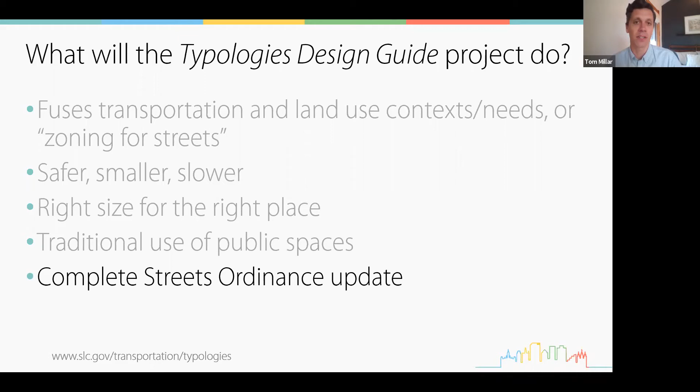The project also began the process of defining the desired changes to and updating our complete streets ordinance, which is turning 10 years old this year. And lastly, this whole process and the result itself has given us a better and more unified vision as a city, getting everybody on the same page and having designs that show what all of our priorities are together in one concise package.

One way that we developed this vision was by having a technical advisory committee. The technical advisory committee was made up of representatives of every department and division in the city that deals with the public right-of-way, as well as our partners at WFRC, UDOT, and UTA. It has been an awesome process to work together, and we're going to tell you a little bit more about that.

So let me dive a little bit more into the why, and then I'll give you a brief at-a-glance of the design guide, and then we'll tell you more about the process.

So the why—why do we want to change our streets? To be frank, our streets are bankrupting us. We spend way more money maintaining our streets than our streets give back to us. So I like to think of streets, because they do make up 80% of our public spaces, as either producers of wealth or consumers of wealth. They're either assets or they're liabilities, and often we put them in the wrong column. We think that they are assets when really we're just sinking money into them without getting anything back.

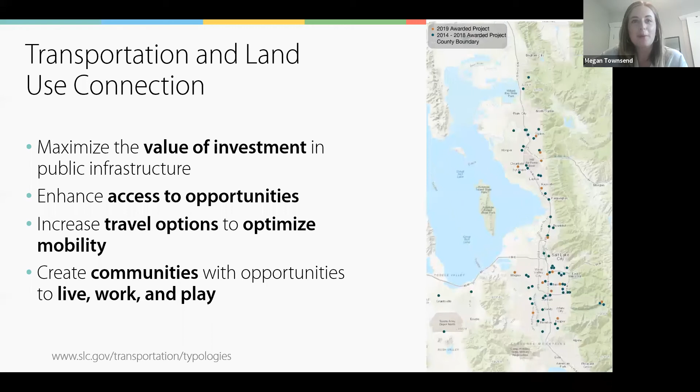And why does Wasatch Front Regional Council, which is responsible for producing the long-range regional transportation plan, care about land use planning, and why are we providing this assistance? As you all know well, land use decisions influence a lot of things. This is not an exhaustive list, but traffic, mode share, transportation choices, access to jobs, access to education, access to healthcare - so getting places - air quality, housing affordability, water use, commute times, open space, community equity, and a whole lot of other things.

So where things go matters for transportation, and it matters for our quality of life as a region. So that's why we have this program, and that's why projects like this are completely within what we want to assist with.

The Wasatch Front could be adding about a Taylorsville every year for the next 30 years. That's about 50 to 60,000 people. And 2/3 of that is from natural increase. So as we grow and change as a region, we want to be there to support. And that's what we do with TLC.

The Transportation and Land Use Connection implements our Wasatch Choice vision, which communities within the region weigh in on. They tell us how they're going to grow, and then we put it into a regional vision. So we're here to help communities figure that out. The vision is essentially an overlaid network of transportation and land use, right? And so where the nexus of those two things comes together, that's what we're working on with TLC. We're trying to do it in a collaborative way, bringing all the partners to the table. And this project was absolutely centered around collaboration. So we're glad we were able to support it, and glad we have great people working on it.

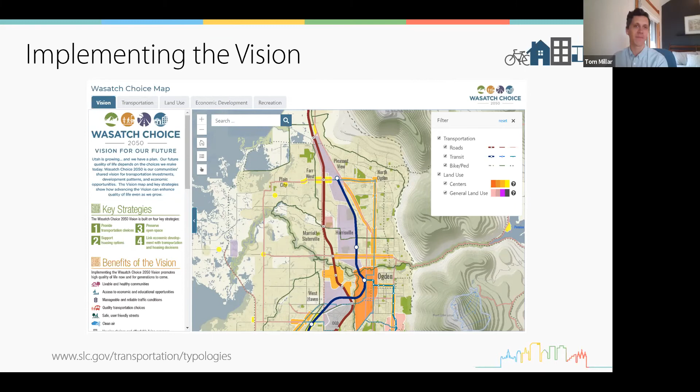Thanks, Megan. So we're going to give a real brief sneak peek at the design guide, and then we'll get into more detail later in the presentation.

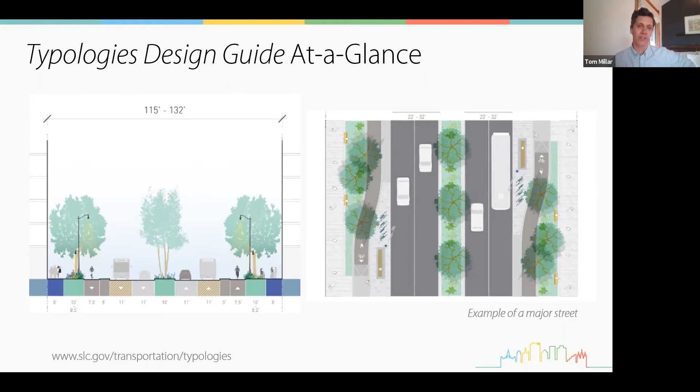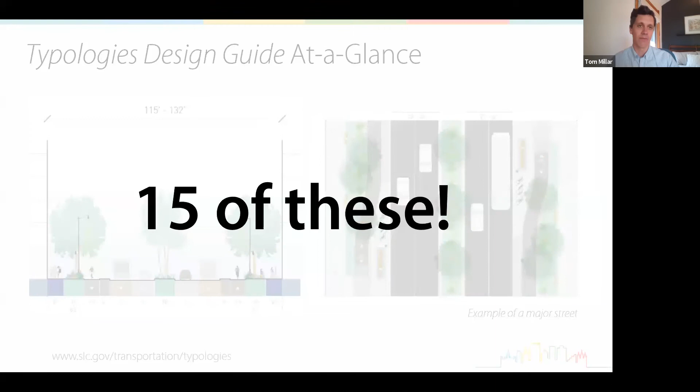But this is kind of the bread and butter of the design guide: our cross sections and information that went into 15 new types of streets. There used to be only 3 types: major or arterial, minor or collector, and local street. But those didn't match the various contexts we had within Salt Lake City.

We also knew that every street needed to achieve more than just the vehicle mobility function. So we developed these 5 critical functions of the public right-of-way and made sure every design had space for each function, prioritizing some higher depending on the place type. These are the place types we developed — a pretty broad generalization of the city's dozens of zoning types, so we knew how our streets needed to look differently depending on the area they were in.

We applied one of the 15 typologies to each of our 8,400 street segments in the city. You can see these colors clustered in different areas, showing where our land uses change, and therefore where our street designs change.

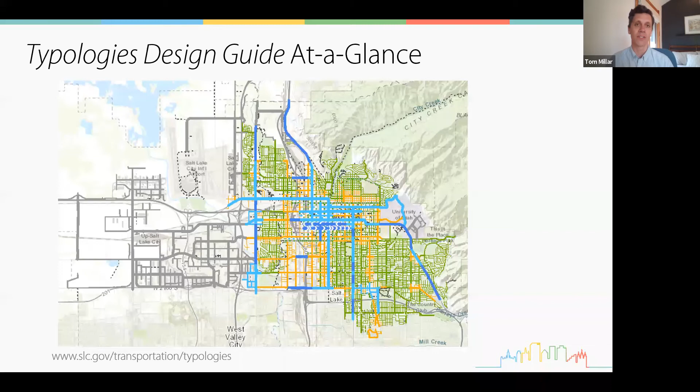Looking toward the future, we know implementation of the design guide won't be like your ordinary master plan — it's really just a reference manual, a book of ideas for when and if a project is built or a street needs to be reconstructed. It doesn't make sweeping changes all at once. When people ask how long it'll take to finish implementation, I say I don't know, it might be a couple hundred years.

We recognize this is by no means a perfect design guide, and just like zoning and our planning guidance, it will have to be updated as the city changes, as people change, and as our needs change. So we're going to tell you a little bit about the process, how we got there.

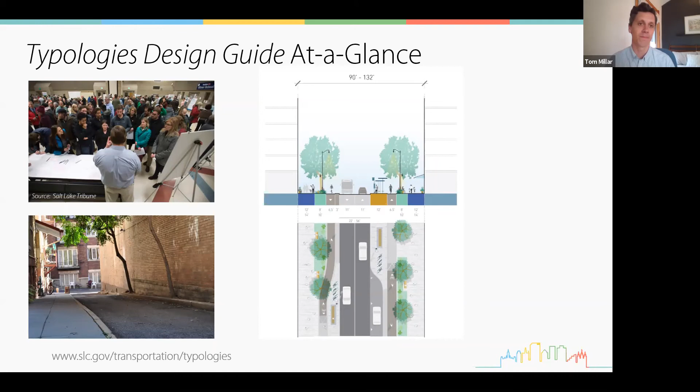Okay, thanks, Tom. I'm going to go through a few slides about what was happening in the background — the sausage making, and not all of it was pretty. The first thing Tom and I did, before we were even under contract as consultants, was meet one-on-one with the heads of all the different departments at Salt Lake City, to get a sense of their priorities and concerns.

We wanted to understand their expectations, and there were a lot of them. We also wanted to understand what background documents existed, what foundation there was to stand from. Then we engaged representatives from all these departments as our technical advisory committee, working with them throughout the process to keep everybody engaged and help inform us as we moved through it.

This also included updating a complete streets policy ordinance — we're not going to get too much into that today.

It was also a situation where the communities wanted to assign a typology to each and every roadway in the county, so that when the time came to make improvements, they knew what the blueprint was for those things. It was a little bit different, though.

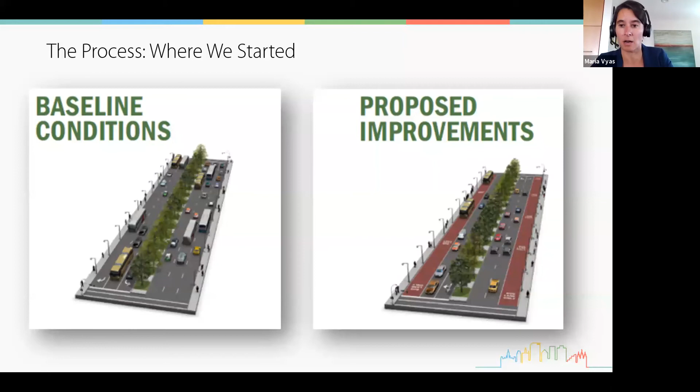So when we started, we were thinking we'd identify the key land uses, and for each one, say, okay, here's a transit-oriented street, or a pedestrian-oriented street, or a bicycle-oriented street, whatever — and that would influence the design of each roadway, based on what mode takes priority on each street. That's kind of where we started.

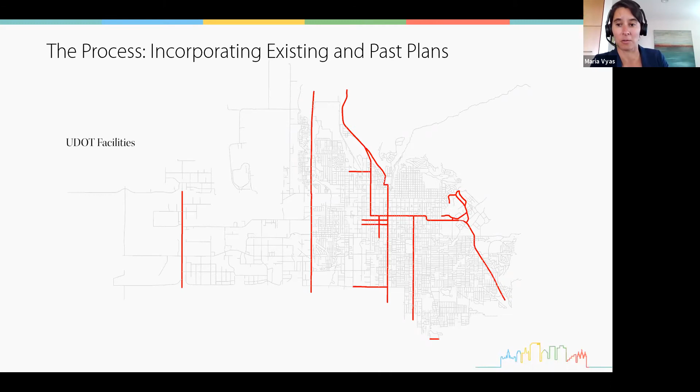So in some senses, this was like just a master GIS exercise where we took all that kind of information. We're like, okay, where are the UDOT roads? Because we know there's going to be a different set of design standards applied to those.

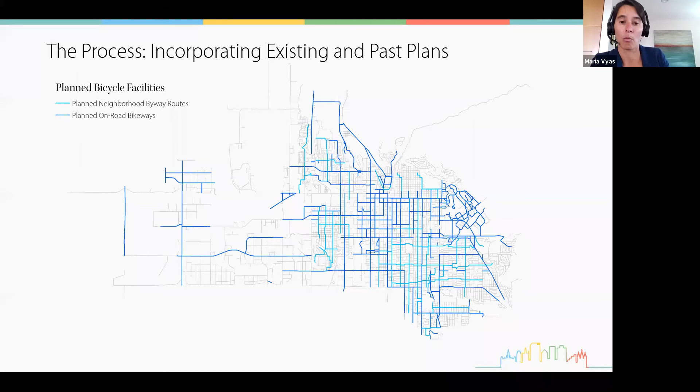What are the planned bicycle and pedestrian facilities the city's already given some thought to? What are the elements on the frequent transit network? On top of that, we knew there was a separate set of transit high investment corridors that the city really wanted to go to a different level of investment on, and the cross sections for those might actually look quite a bit different.

Part of this was understanding where the greening features were within the city, and how we take advantage of those and incorporate them into our plans. So we were in the process of mashing all of these sets of data onto one master set of GIS files.

It was the street centerline file, and we were smushing stuff on top of it, adding pieces of information like: is it on the bike network or not? Is it on the transit network or not? Salt Lake City had the advantage of already having a ped bike master plan and a transit master plan, which were really helpful because somebody had already given thought to what the priorities needed to be on these different streets.

So we were adding all those things in and getting through all of those transportation pieces. And then we kind of had to hit the brakes a little bit, because the piece that was missing was the land use.

We had walked into this assuming that Salt Lake City would have some kind of map or generalized sense of what the big land use categories were, right? Like downtown areas versus little neighborhood nodes versus residential areas or other kinds of things like that. The city didn't have that.

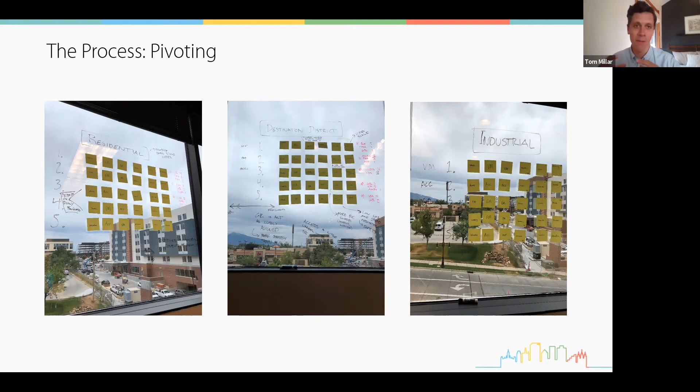That was something that I learned as a project manager and as a transportation planner, was that if we're really going to be serious about merging transportation and land use, then, no pun intended, we as transportation planners kind of have to take ourselves out of the driver's seat and ensure that transportation is not the leading authority or the leading purpose of our streets, because that was the problem we were trying to fix.

We knew that for a long time, our streets have pretty much just served a transportation purpose, but with all of that wealth of space that we have as cities, we knew that they could do more. And we knew that our residents wanted them to do more in order to achieve the various needs that they had in their life. So this was the first blush at these 5 functions.

We had person mobility, vehicle mobility, placemaking, greening - those are still the same. Access, we just changed the name to curbside uses because it was a little bit more descriptive of where in the right-of-way it was talking about. But we knew that there was going to be different modes or different uses, different types of use that were going to occupy the spaces dedicated to each of these right-of-way functions.

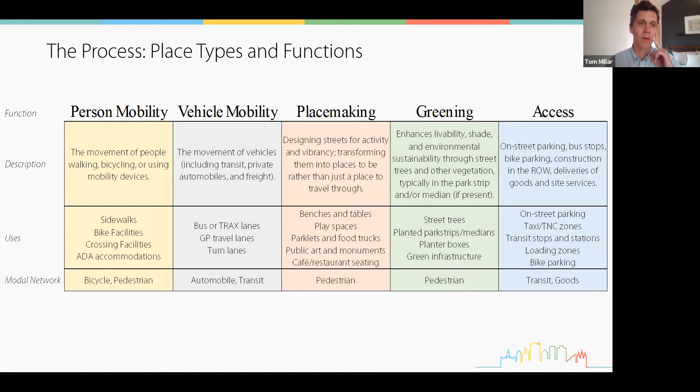And then we knew that it was probably going to be associated with a particular transportation modal network or choice too. So like Maria said, we then prioritized these based on the place type. We knew that in a neighborhood, greening and person mobility were going to be more important, not only because of what we know about the context of Salt Lake City, but because of the input that we got from the public, and I'll mention that in a couple slides.

But in a downtown or a destination district, we knew that placemaking and ensuring that it was a memorable place was also really important, and that vehicle mobility was not as high a priority because that was your destination - you were already arriving there. You didn't need to maintain 40 miles an hour as you went around the destination district, because that would probably subvert all of the other purposes of the right-of-way.

So these are the final 5 that we decided on, and we asked the public how would you rank these based on different areas in your life, different areas in your day-to-day. And I'll show you what the survey results said. This was last fall, late summer, fall, so about a year ago.

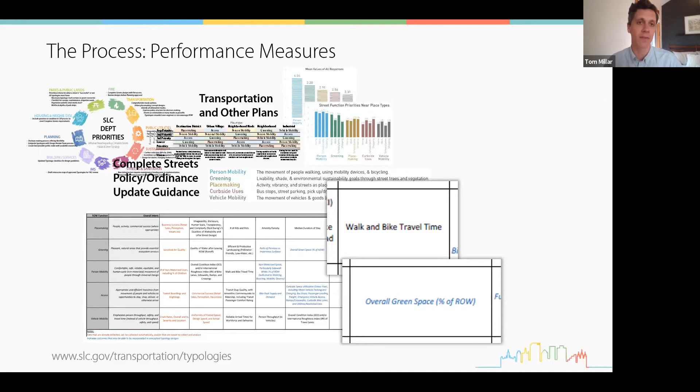While others, like how long does it take people to walk and bike places, could be things that we could monitor after the fact. We also got critical design dimensions from our technical advisory committee, like how big is a garbage truck, how big is a TRAX platform, how wide is a gutter, and what types of trees we should have on particular streets, so that the typologies were as realistic and implementable as possible.

And then lastly, our agency partners were so critical to the process, because the Typologies Design Guide does not just apply designs, proposed designs, to city streets. It's every street in Salt Lake City.

So working together as equal partners and having these partner agencies write their sections of the design guide's implementation chapter, so that it was very clear what their role was going to be, what our role was going to be, and how we were going to work together to implement and maintain these facilities. It was a really awesome process.

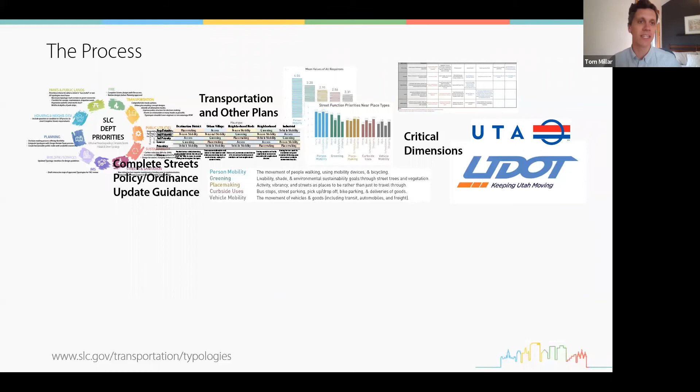So all of those things together, that was a lot, and that was about 1.5 years worth of work. All of those things together, we put it in a hopper, and out comes these 15 typologies that I mentioned earlier. You can see that we had at least a couple, if not multiple, up to 4 typologies per place type, and then we had 3 typologies that were place type agnostic.

Once we had these designs, which I'll show you in a second, we put them back out to the public and we asked, did we get it right? Did we apply your priorities that you told us last year correctly? And what do you think of these designs and where we applied them? Now we're working on synthesizing all of that feedback into the final draft of the design guide.

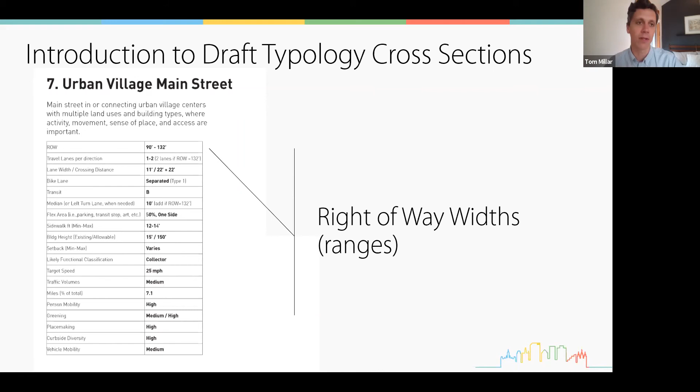We have right-of-way widths. These are ranges, because we've applied them to different streets with different widths of right-of-way and amount of space that we can work with. Next are the different elements that make up that right-of-way: the parts, bike lanes, buses, trains, sidewalks, parking, travel lanes, and how wide they are.

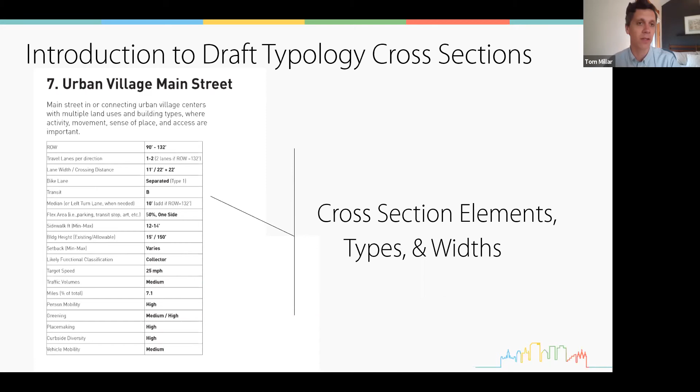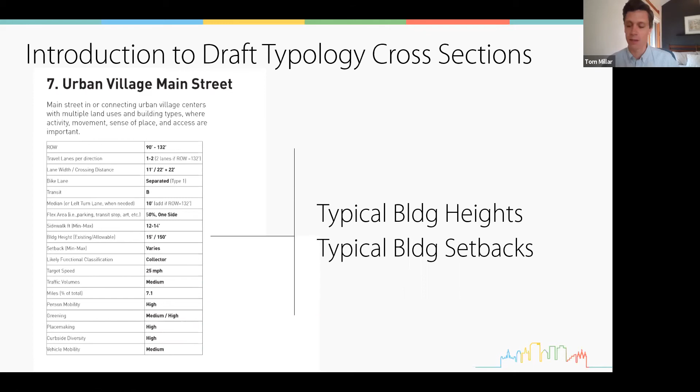The planning and zoning information, which is very key, as we've mentioned. What do the buildings next to the street look like? How tall are they? How far back from the street are they? And what kind of demands do they put on the street?

And then these more traditional transportation planning terms like functional classification, we keep that in the background, our arterial, collector, and local, as well as the number of cars that are likely to be on that street, so that we don't design a street that's too wide or has too many lanes, or too narrow or has too few lanes.

And then, as I mentioned before, we have this criteria called target speed, which is basically make the right speed the easiest speed to drive. Don't put up a sign that says 40 and then design the street to be 70. Or don't put up a sign that says 15 and design the street to be 30.

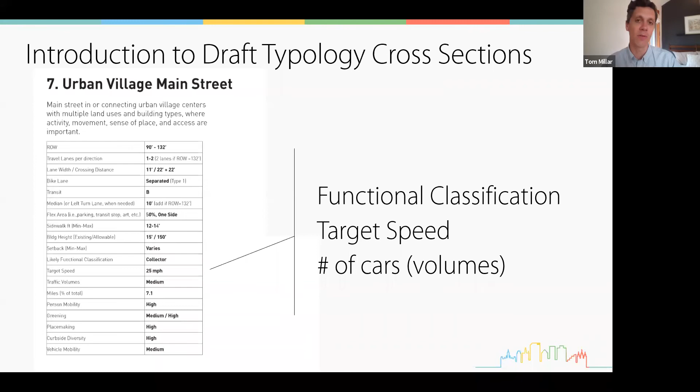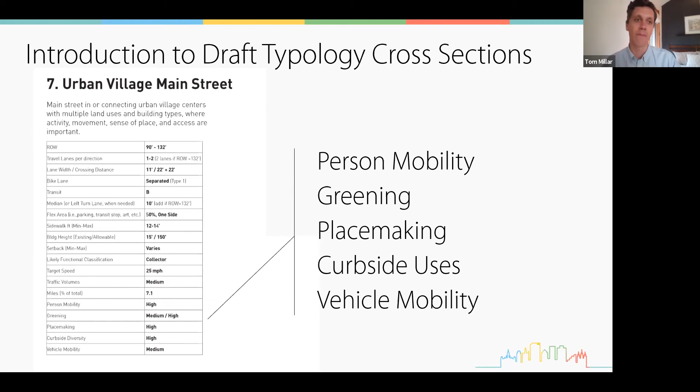We want people by design to be making the right decisions and to be moving slower and more safely through the city. And then lastly, again, we have these 5 functions of the right-of-way and how they are prioritized differently based on the land use and the transportation demands on that street.

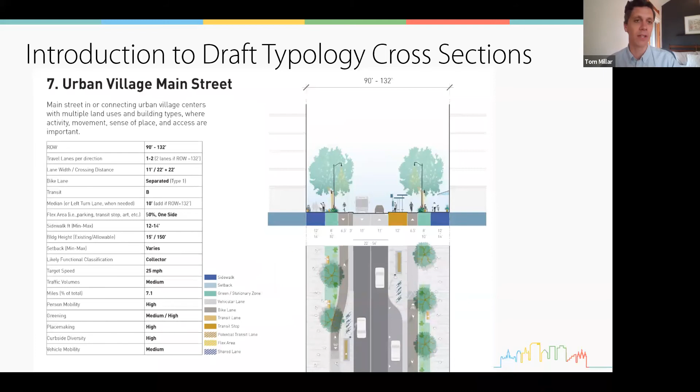So here's a look at that typical sheet that we have for each of those 15 typologies. We have a cross-section with dimensions and different right-of-way elements defined. We also have a plan view to show how this might change as you move through the street, because it's not all about just designing at mid-block.

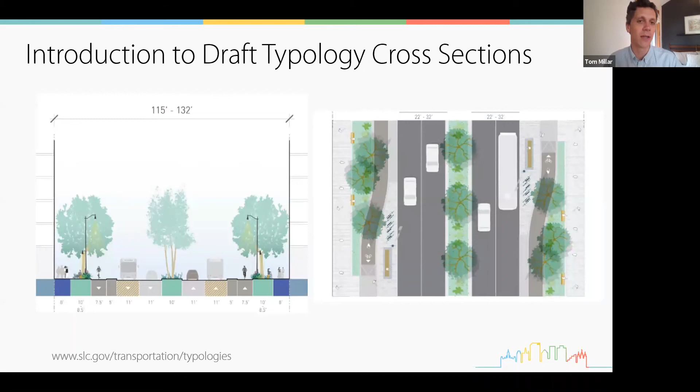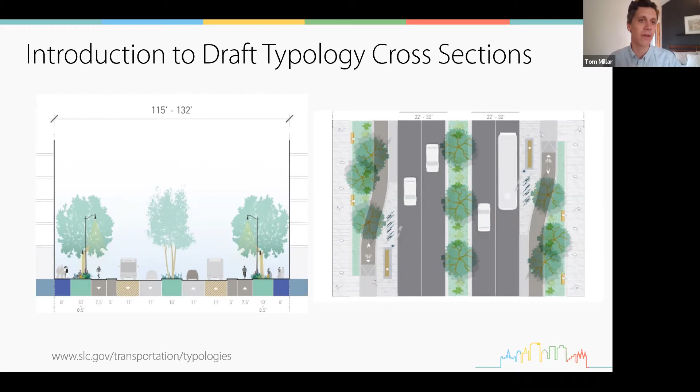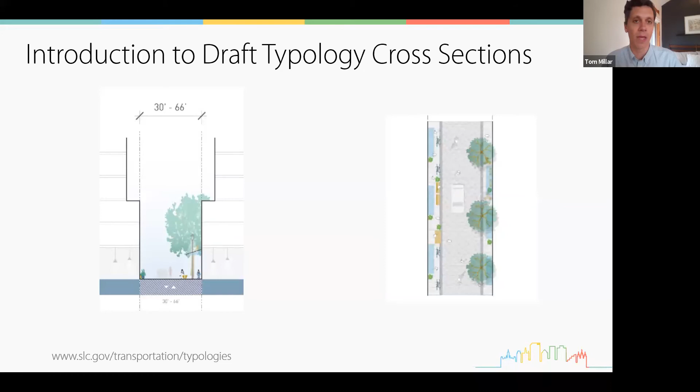This is one of our smallest typologies. This is a small commercial street in a downtown, similar to maybe Regent Street, if you've been on Regent. And this is an example from Boston, Massachusetts, of also what an implementation like that might look like.

You can notice on these typologies that the buildings on the sides of the streets change as the typology changes, so that it's very reflective of what type of place that street might be going through.

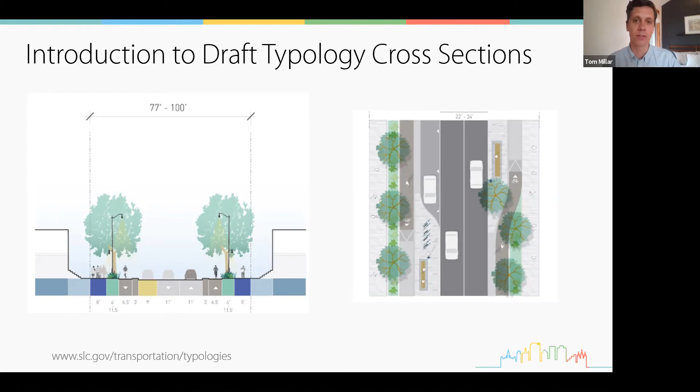So this is a neighborhood connector street, maybe like, if you're familiar with Salt Lake City, like parts of 1700 South or parts of 300 North, that have mostly residential uses, but need to provide some type of a connection to local streets and also to arterial streets. Here's an example from the Netherlands of what that might look like.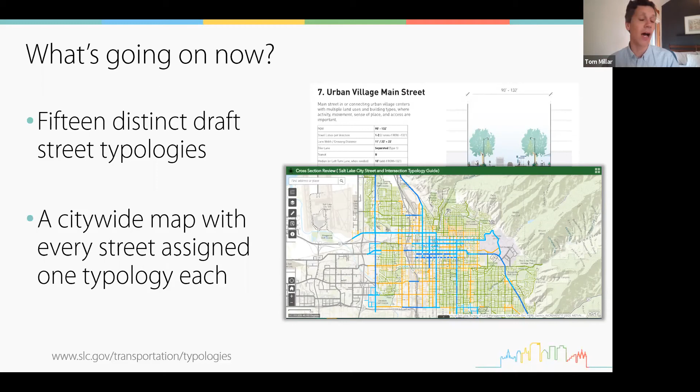So what's going on right now? Well, we've developed these 15 distinct draft typologies, and we've applied one typology to every street in the city. And we've put that back out to the public and asked them, not only do you agree or disagree with the typology, but do you agree or disagree with the application of that typology, either on the street you live on, or the street your favorite business is on, or what have you. And we've gotten a lot of feedback, and it's awesome feedback, and we're working right now to make changes.

So we had that public review period that just ended at the end of August, and now we're working on finalizing the design guide, working with council on the adoption process and what changes we can make to make it as good as possible before adoption.

So now we're going to show you even a little bit more about how the sausage was made and some of the lessons that we learned behind the scenes, because it wasn't perfect. It looks nice, but we want you guys to understand how things really went and the things that we learned, so that you can take those lessons and apply them to your projects as well.

And one of the things that we kind of caught on to was that there is not always a lot of communication between the people that are in those different departments, between the people that plan the projects and execute the projects, and then the people who have to maintain the projects.